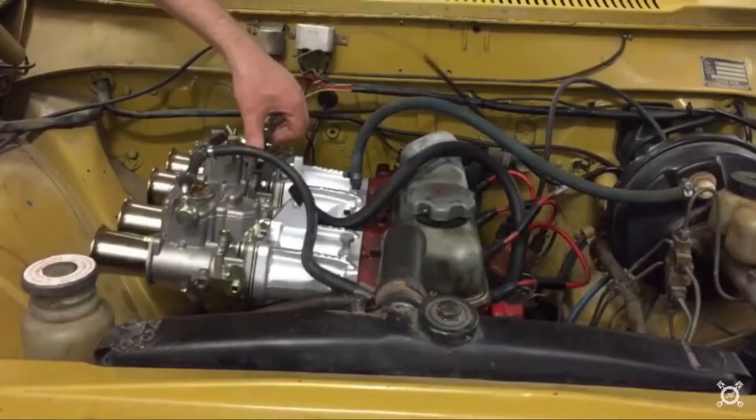I have a list of what to do. There are some phases that I wanted to write down so I don't forget. So first I have to take the old oil out, then I have to get the diff out, and before that I have to remove discs, calipers and axles. I have to pull the axles out so then I can get the diff out.

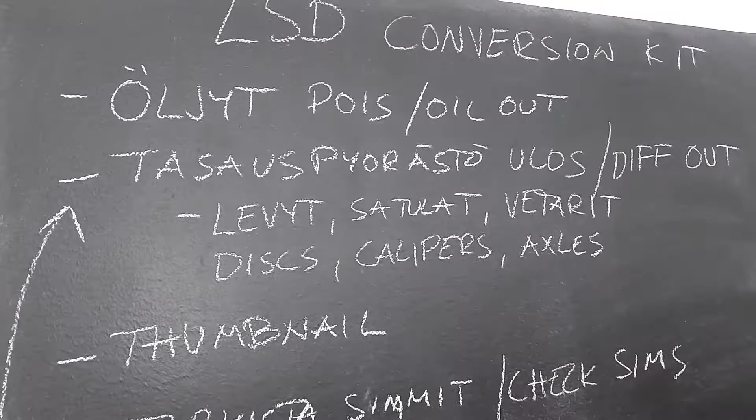Then I have to remember to take the thumbnail for this video, and then I have to check the shims. I don't know if that's a correct way to write it, but the shim discs or shim parts that are holding the diff in place. It's very important that I put the right shim on the right side so the adjustment stays as it is.

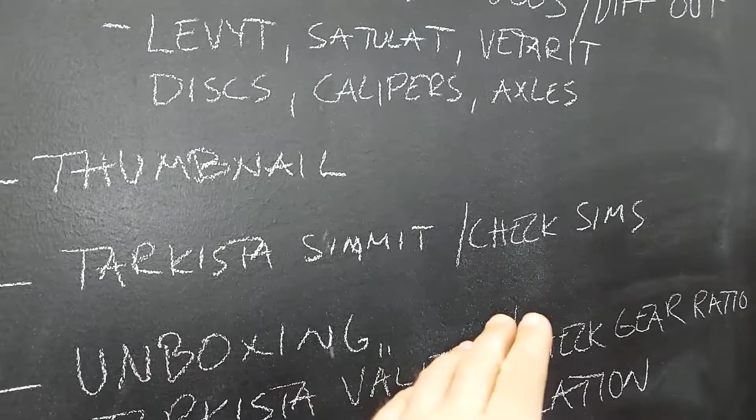Then I will unbox the set. Then I will check the gear ratio, because I have changed those rear axles, or actually the whole rear, so many times that I'm not so sure if that rear is from 145 or 142. So I have to check the gear ratio. Then we will do the installation.

I have watched a few videos from Racing Diffs, and they have the three most common ways to fail this installation, so I will tell you what those points are that I'm focusing on. Then we will have to put new oil in, and one of my viewers on the Finnish channel noticed that on the Panhard bar I forgot to put the washers on the other side, so I have to fix that.

And the rear arm bolt is a little bit loose in the rear. The rear arm bolt on the right side, if I remember right. So I have to tighten that also. We have quite a few things to do. But next I will put my camera on the stand.

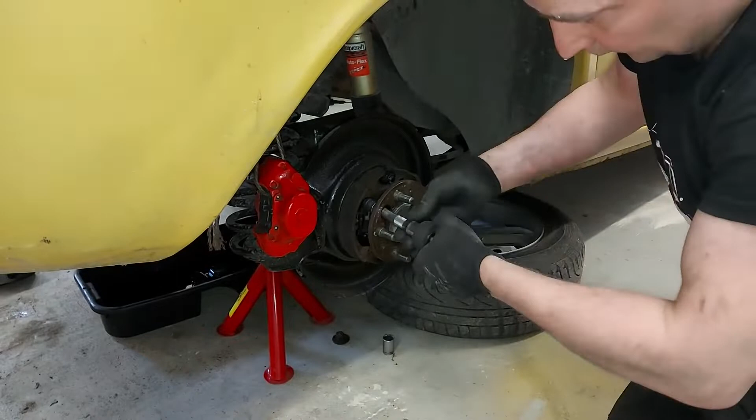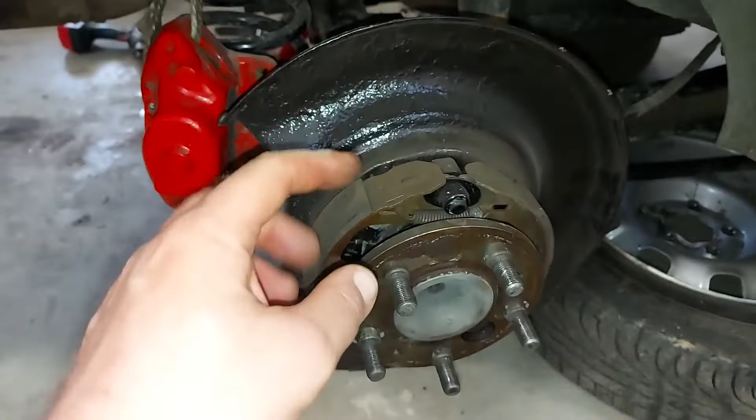I have pulled the axles out on both sides. It actually is quite an easy job. On this side I even left the brake shoes on. On the left side I took them off, but then I realized that it's not necessary, so I can pull the whole pack out, just missing one washer. It's still inside there, but I think I will find it quite soon.

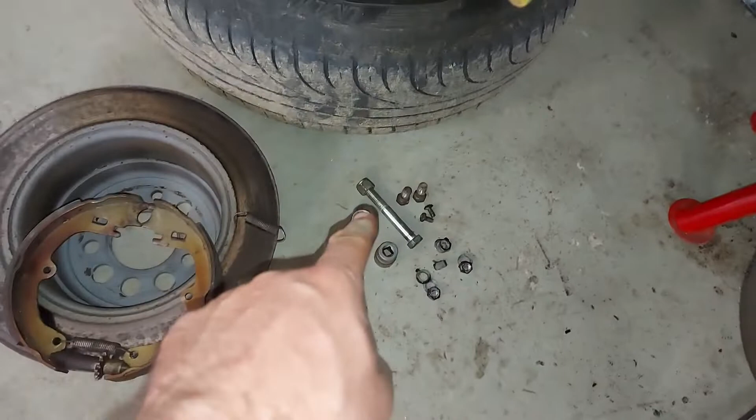And I also removed the Panhard bar, so now there's enough clearance to get the diff out, and I just have to add the washers on that Panhard bar bolt on both sides, so it will be better like that. And I managed to get the oil out, and next I just start removing the diff, and I have to be careful what is coming out, because all the parts should go the same way back in.

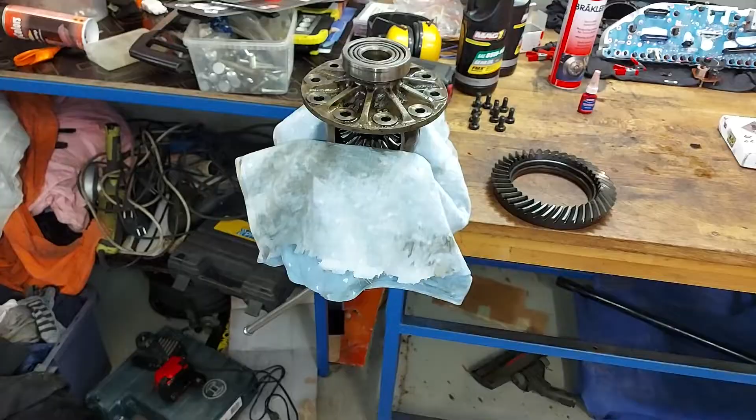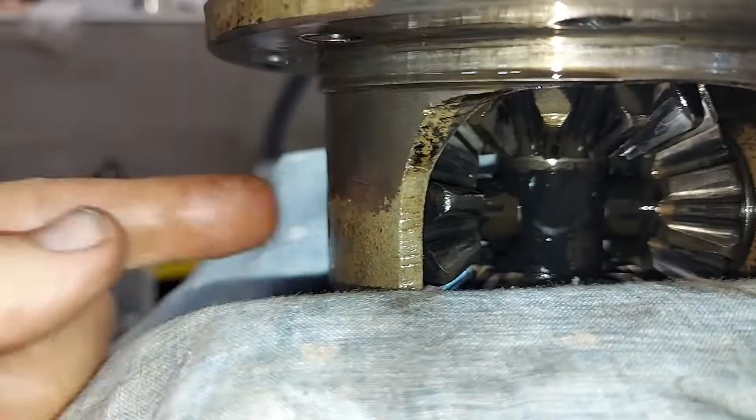Now I have the diff here on the table, in my vise. There is that pin going through the gears, and next I have to remove that. And I noticed that there is a pin that I believe goes through that bigger pin. And I have to push it out from there. You can see the pin there. I think I will press it out, and I should have a replacement here in this set.

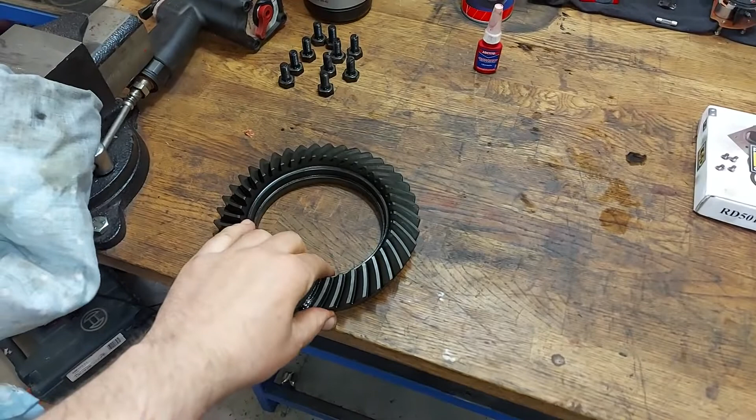Somebody asked what the gear ratio is in my 145, and I learned about the gear ratio just a few minutes ago, because I'm not a professional. But you can see here there's 41 and 10. So it means that the number of teeth here is 41, and in the rear, the gear that spins here has 10 teeth. So the gear ratio is 41 divided by 10, so it's 4.1.

The bigger the number is, the better the acceleration, but the top speed is lower and it consumes a lot more fuel. When this is smaller, like 3 point something, it doesn't accelerate as fast, but it has a bigger max speed, and the fuel consumption is better. So if I have understood something wrong, please correct me, but that's the thing.

And here the gear ratio is 4.1, and the rear here in my Volvo is the small rear, which is 1030. So it's 1030 the rear, small rear, and this gear ratio and this diff fits in that rear.

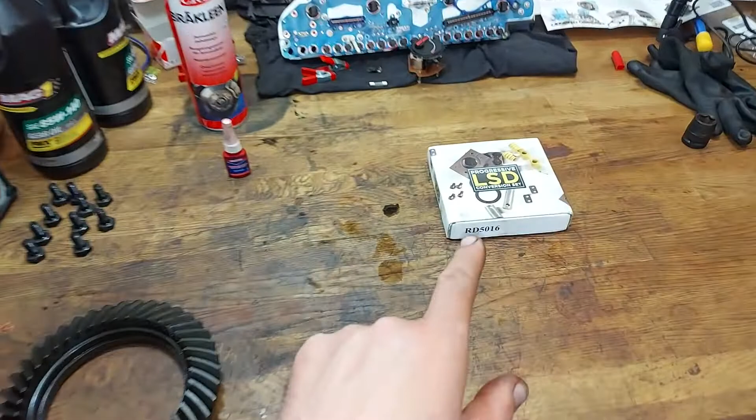Next I will do unboxing, and we will see what's in the set.

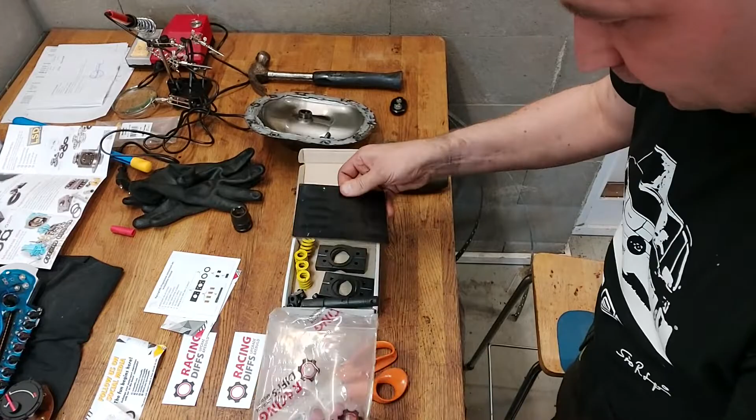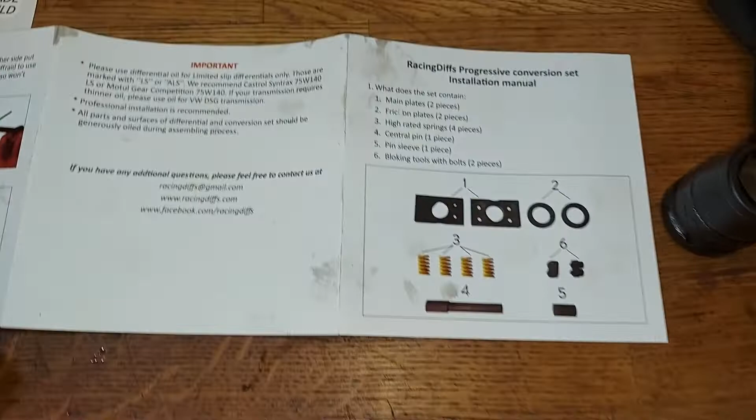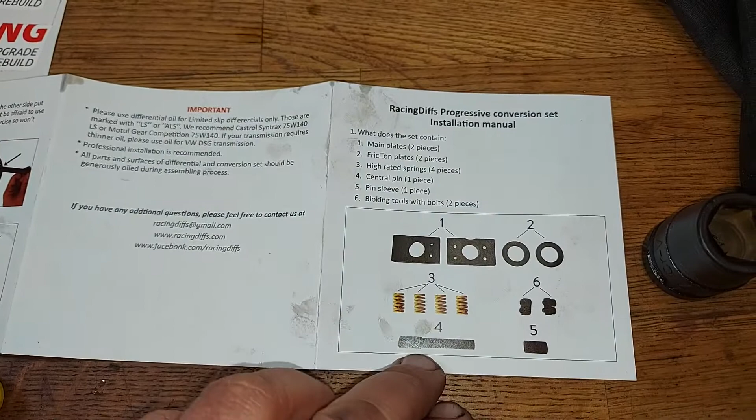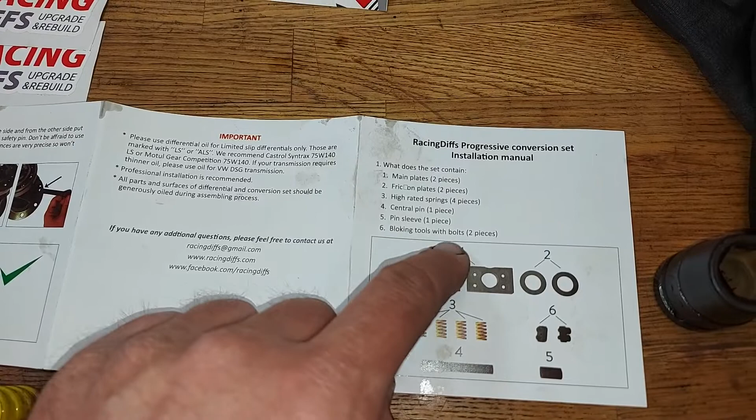Now I have all the parts here ready, a few stickers, which is nice, good instructions and all the parts. So what I have: main plates, 2 pieces here, and then I have 2 friction plates, these like big washers, and number 3 high rated springs, yellow ones, and central pin number 4, and pin sleeve number 5 here, and the sleeve goes on this central pin like that, and a blocking tool with bolts, 2 pieces, and it's these.

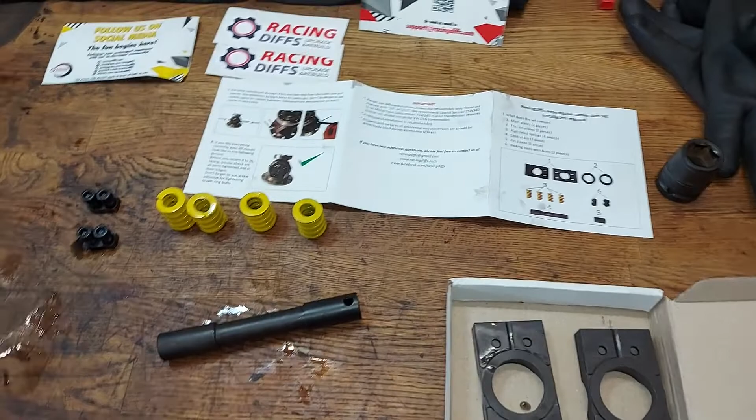I will show you how I do it. I have watched a few videos, and I think I'm able to do that. And the instructions here are actually quite good.

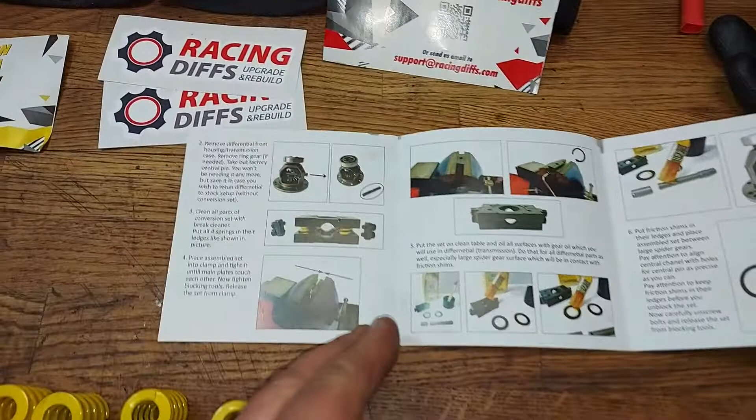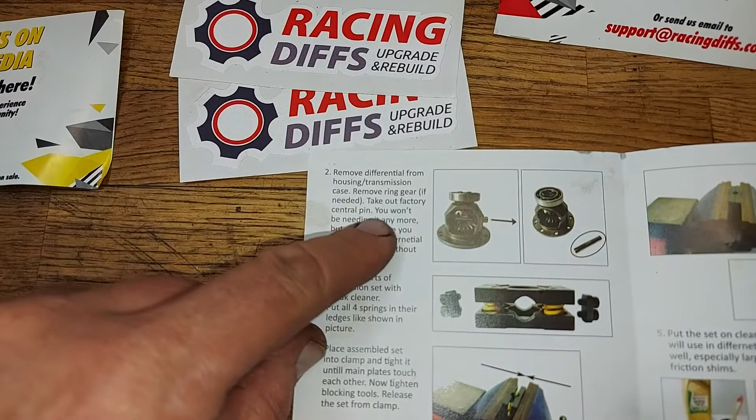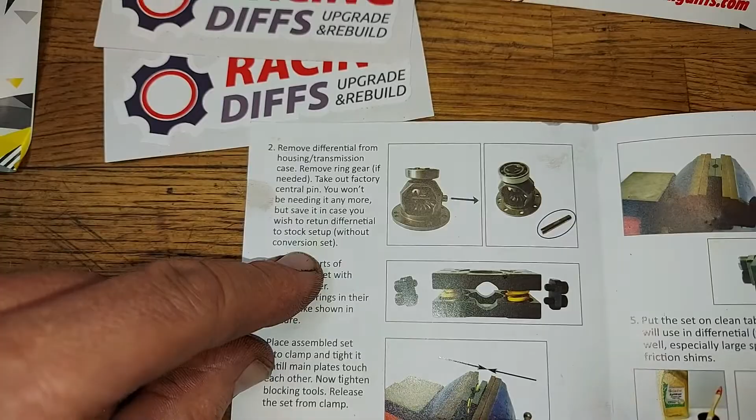First I have to remove the differential from the housing transmission case, which I have done already. And then I have to take out the factory central pin. You won't be needing it anymore, but save it in case you wish to return the differential to stock setup without the conversion set. The original central pin is there, and there's the safety pin here.

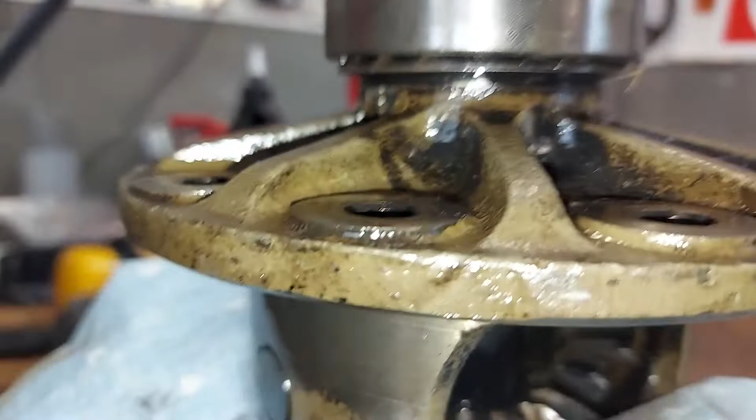I have already pushed it from up to down, so it has come a little bit out. So I will tap it out. Or actually, I think I will tap it just like there, so it will stay there, so it's much easier to push it back. But first I have to take it down so much that I can push that central pin out.

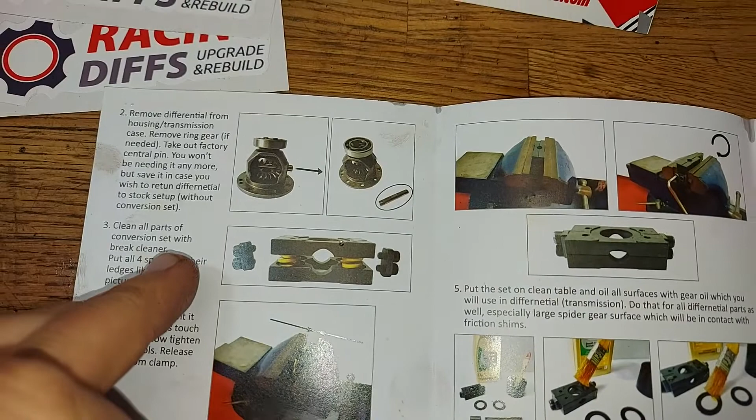And then I will clean all parts of the conversion set with brake cleaner. And I will do that. I have a brake cleaner here ready.

Then place the assembled set into a clamp and tighten it until the main plates touch each other. Release the set from the clamp. So I will put the springs here, and I will use my vise and these blocking tools.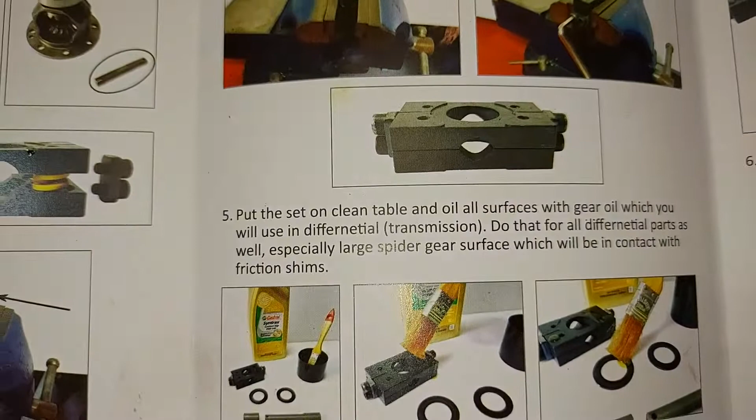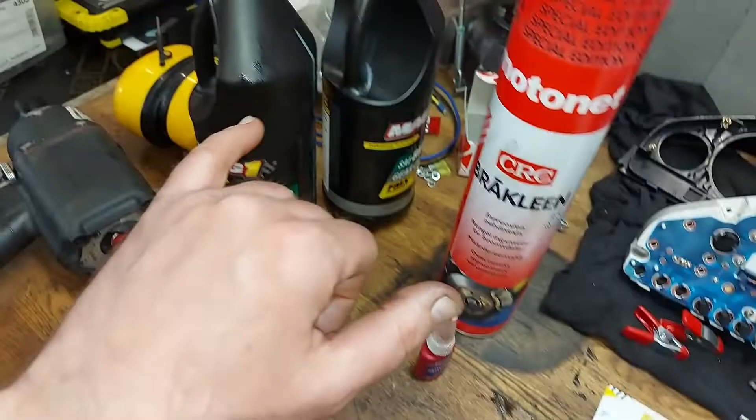Put the set on a clean table and oil all surfaces with gear oil, which you will use in the differential transmission. I have the oil here ready. It's an LSD friction oil specially for this use.

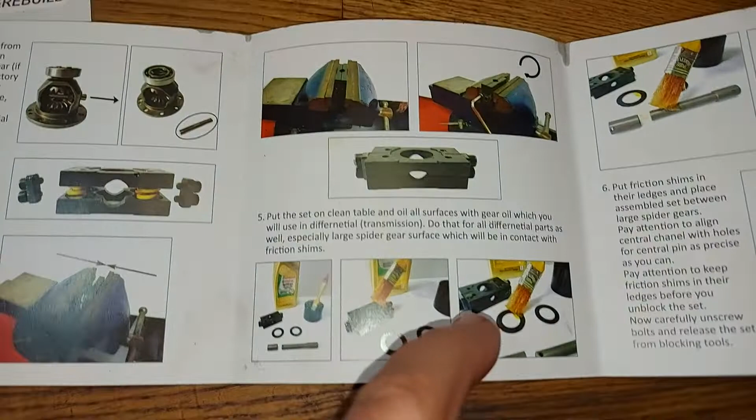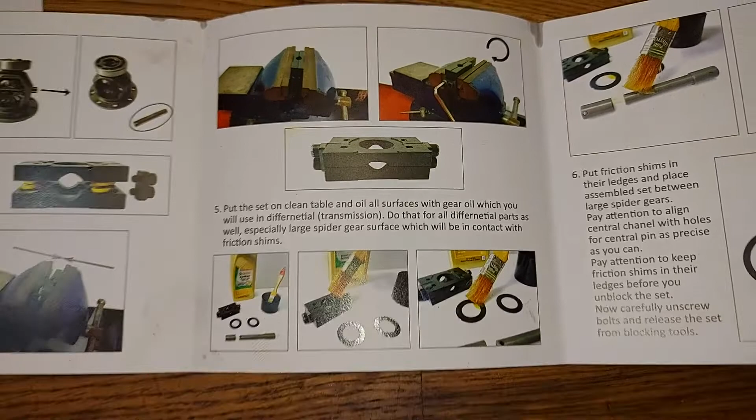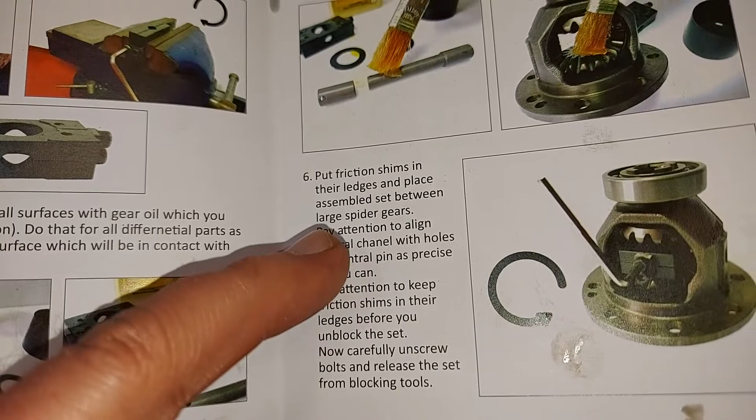Do that for all differential parts as well, especially the large spider gear surface which will be in contact with friction shims. So I will use a lot of that oil, and put friction shims in their ledges. I don't know how to pronounce that, and place the assembled set between the large spider gears like that.

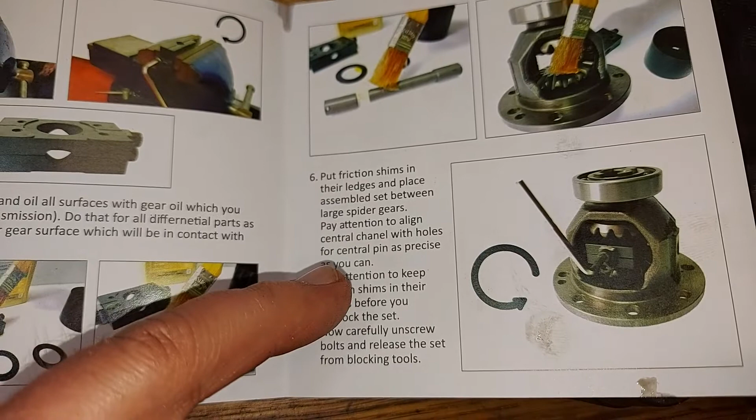Pay attention to align the central channel with the holes for the central pin as precise as you can. Pay attention to keep the friction shims in their ledges before you unblock the set.

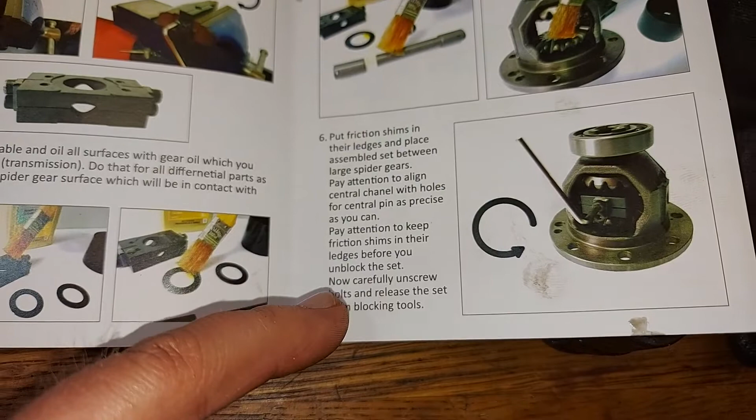Now carefully unscrew the bolts and release the set from the blocking tools. Yes, I think it's quite easy in this phase at least.

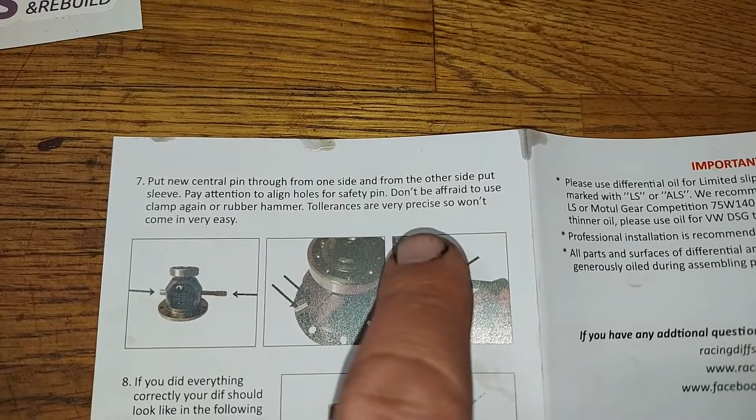And then put the new central pin through from one side, and from the other side put the sleeve. Pay attention to align the holes for the safety pin. Yes, makes sense. Don't be afraid to use the clamp again or a rubber hammer.

Okay, tolerances are very precise, so it won't come in very easy. All right, and if I have done everything right, it should look like that.

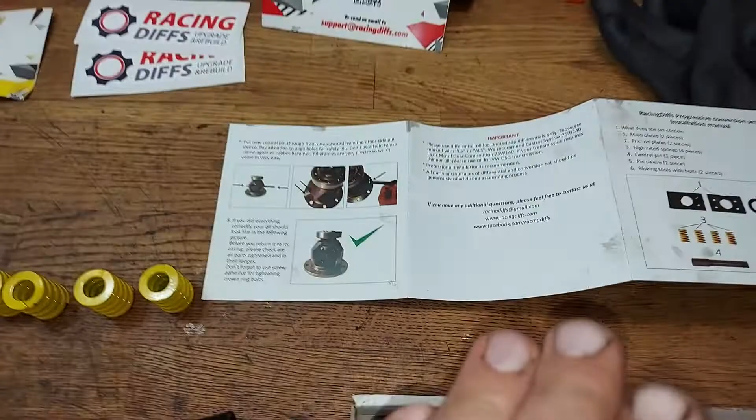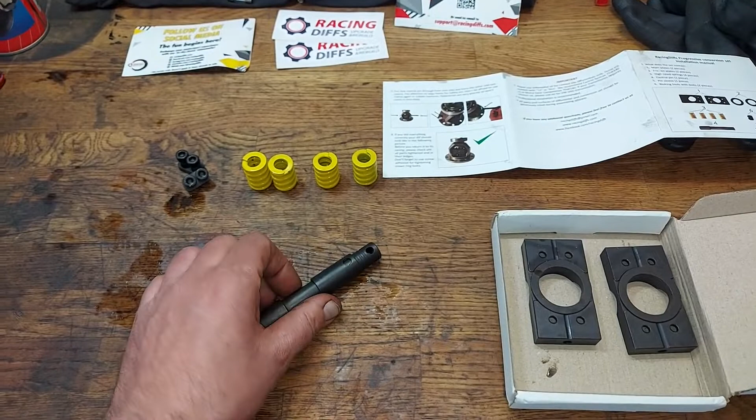I watched a video from Racing Diffs that there are normally three things people might do wrong when assembling the conversion kit. First is that someone doesn't use enough assembly oil. For example, the central pin and this sleeve, it's very important that there's a lot of oil between these.

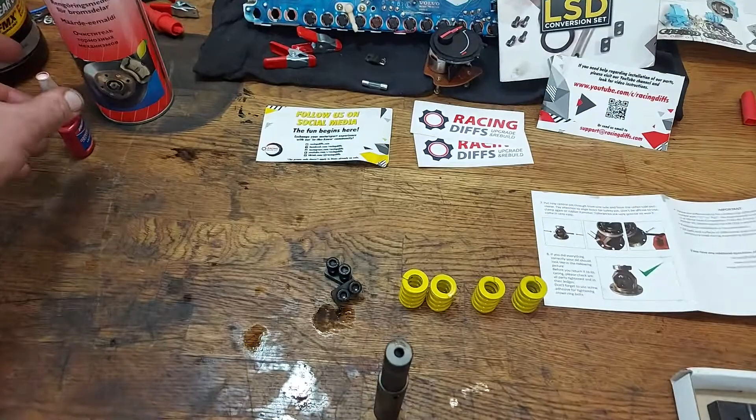In some models there is a locking screw in the end of this central pin, but in this Volvo 1030 rear there's a safety pin, so I don't have to use Loctite in this assembly as I thought, because I just have to use the safety pin. So that was one mistake - people not using the Loctite in a correct way.

The screw in the end of this pin will come out and destroy the whole rear. So lubricate all the parts carefully and then lock the screw correctly, or use the Loctite in a correct way. The third thing was that in some models there is a locking ring for the central pin.

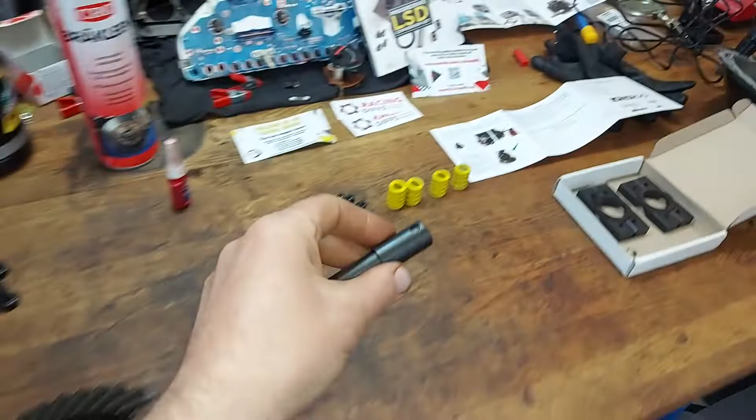If I put this in and hit it with a hammer, I might break the locking ring. But in this model I have the safety pin, so I think even I can't break this system. I should be able to do this correctly, because I've taken care of all the precautions and learned from others' mistakes.

So I hope I can put this together, and next I will put my camera on a stand and show you how I did it.

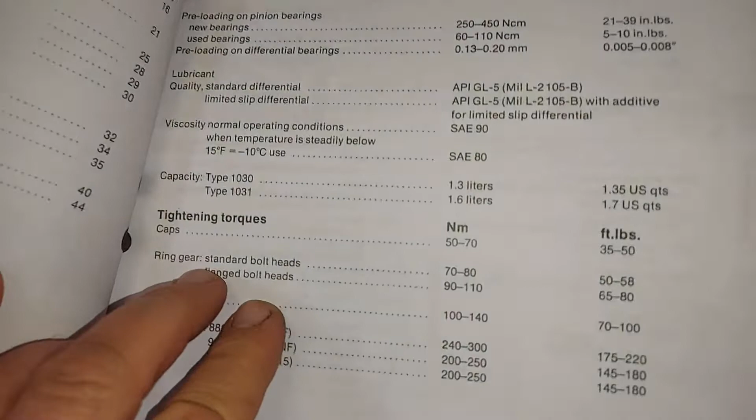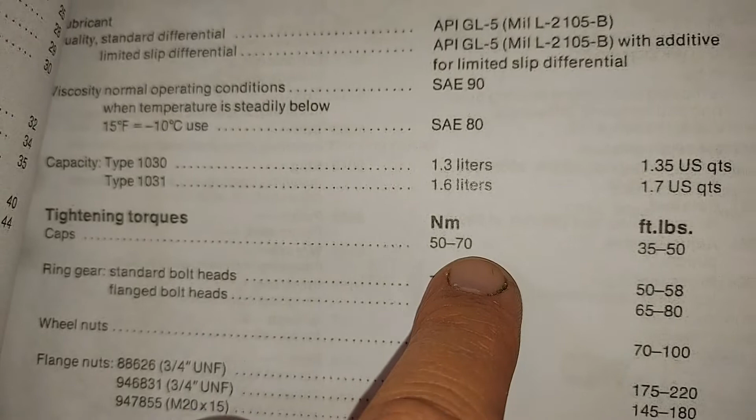I found this rear axle repairs and maintenance service manual on the internet, I just Googled it, and this is quite handy because from here I can see that the ring gear standard bolt heads need 70 to 80 Newton meters, and the bearing caps 50 to 70 Newton meters.

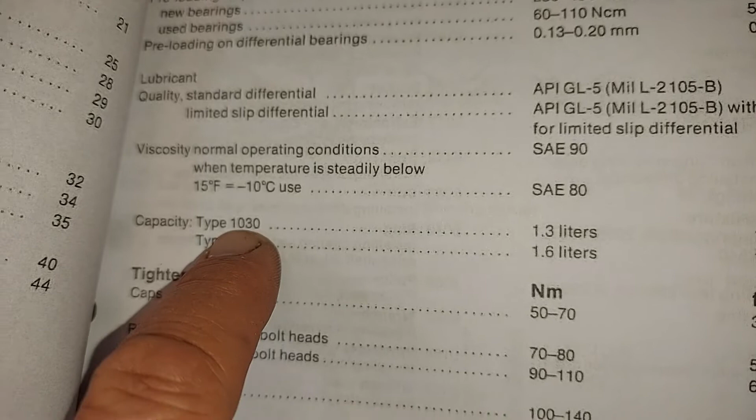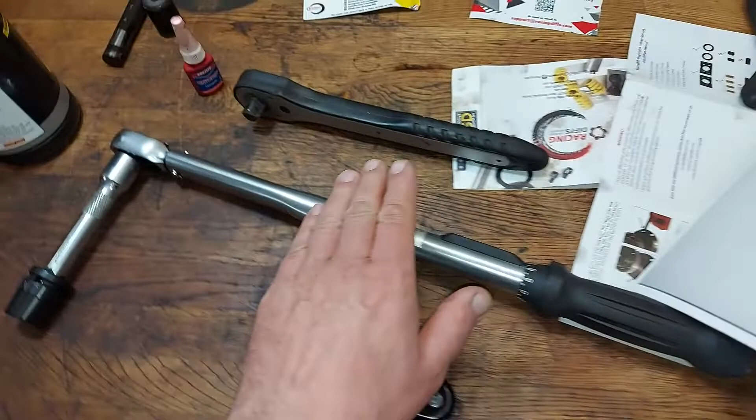So now I know how tight I will turn them, and the capacity of this 1030 rear is 1.3 liters, which is exactly what I have, which is nice. So this shouldn't be too difficult. Next I will take my torque wrench and tighten the bolts.

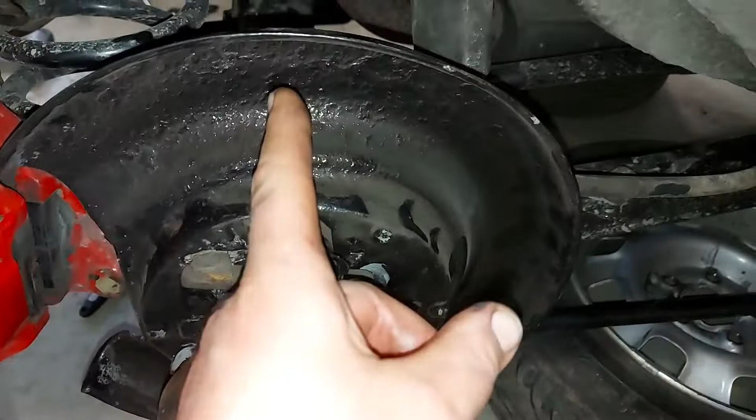...is caused by the diff lock. Did I do something different, or can the axle go deeper now, or why can the bearing be this loose? I have tightened all the nuts, and I have the same problem on the left side.

And on this side it is actually worse. Now I have opened the nuts and bolts, so I can't show you, but here it moves almost 1 centimeter, and that's why it moves up and down even more.

So now I just have to figure out what's wrong in this picture, but that's why I can't do the test drive, and I would appreciate your comments below a lot if you can help me figure out what I've done wrong.